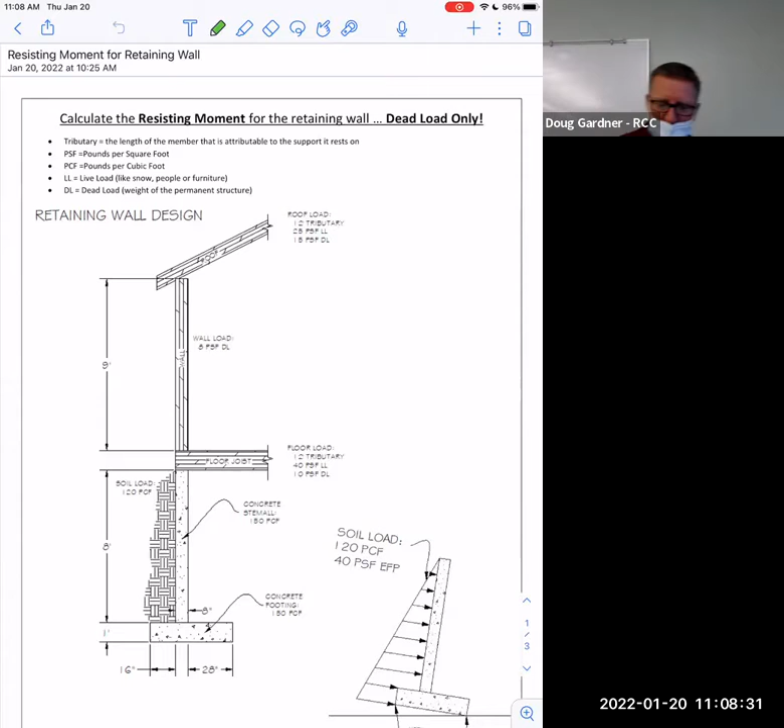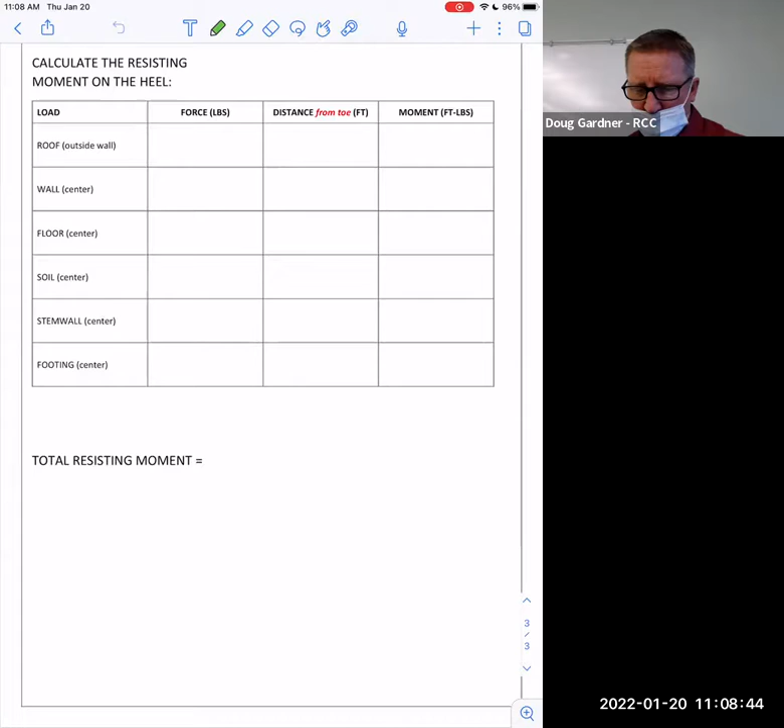So I want to give you a little background for this because I want you to understand. This won't take long once you get rolling, so I want to make sure you understand the logic. I'm going to show you some things that you don't learn in the book, but that exist in the real world.

So here's my intro to the, what did I call this thing? The retaining wall. And I mentioned this going out the door last week or Tuesday.

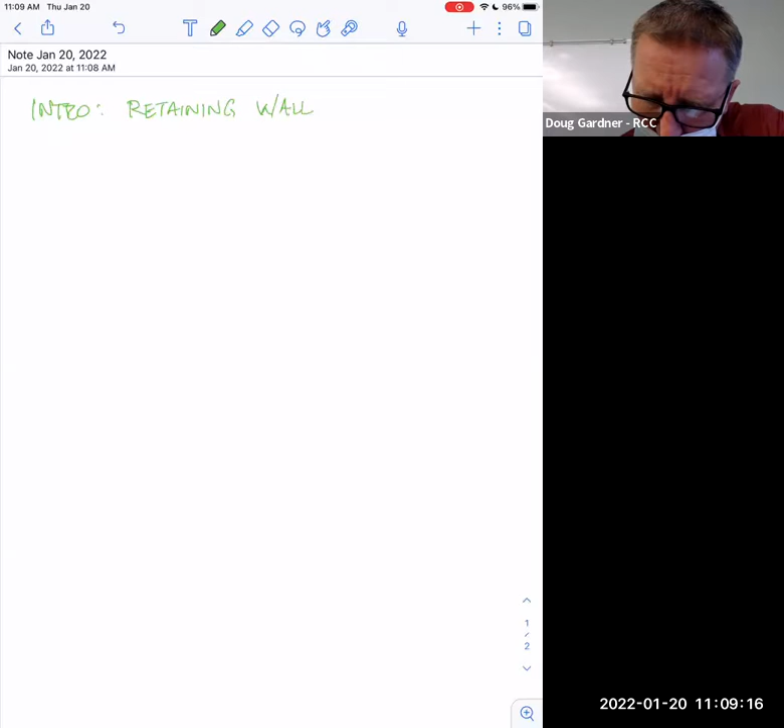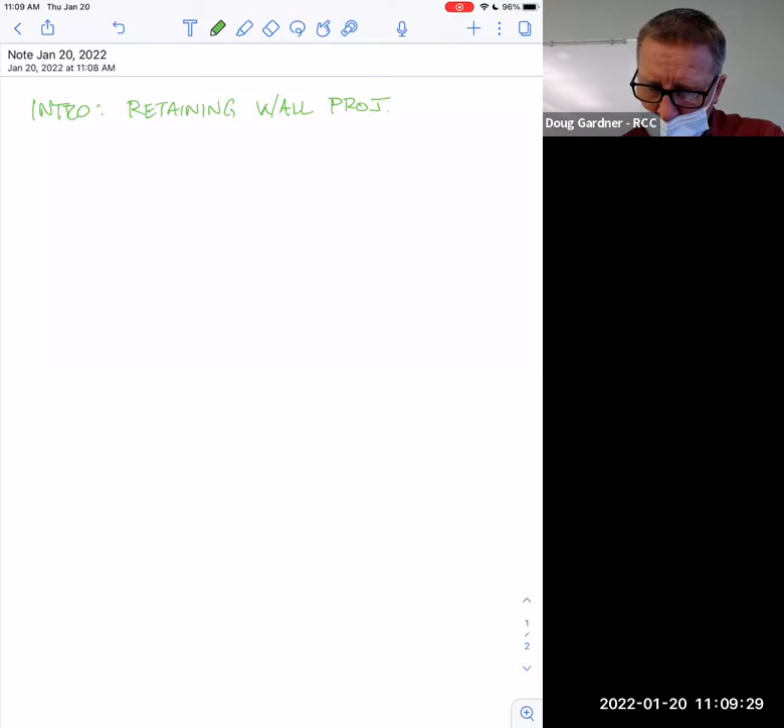Let's see, how do I want to do this? I think I'll try to do this in 3D. Let's do this upright. So let's say I've got this building, and so that's the four walls of a building.

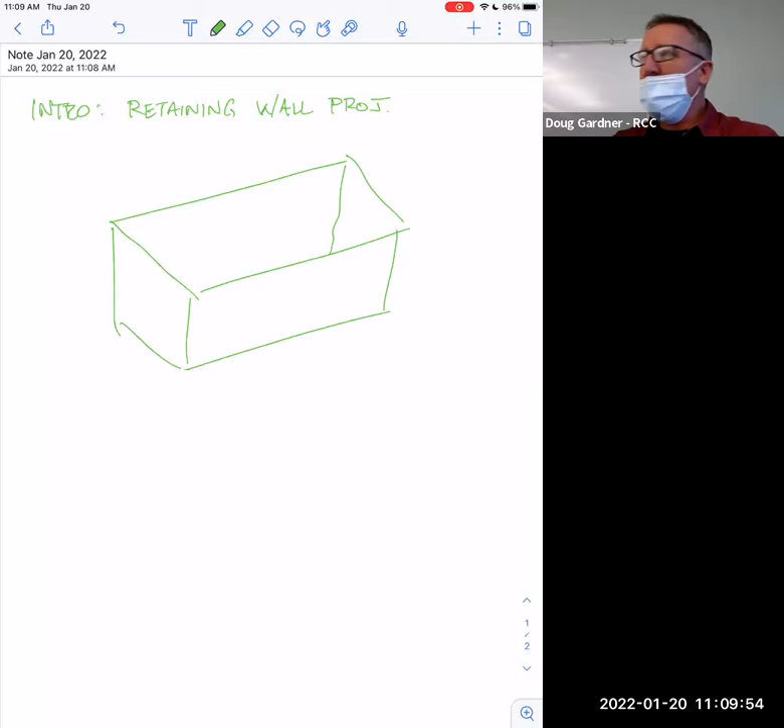And then because it's a two-story house, I say okay cool, let's put some floor joists on that house so I got something to stand on the second story. And of course that's what we're standing on right now because we're on the third floor and there's something we're standing on. So this is kind of how this happens.

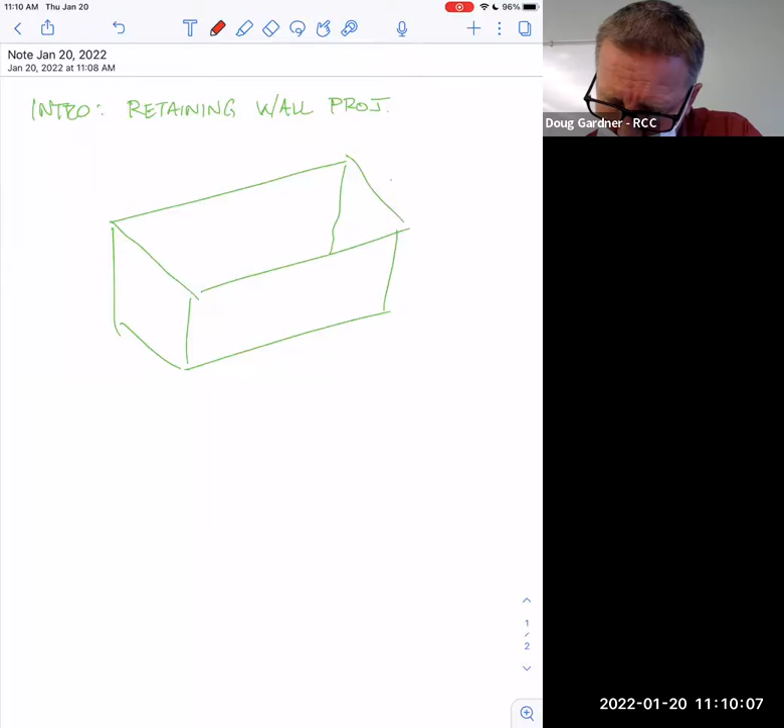So you build the four walls, and let's say this is 22 feet and this is 48 feet. So that's the size of our building. And here's what I decided to do.

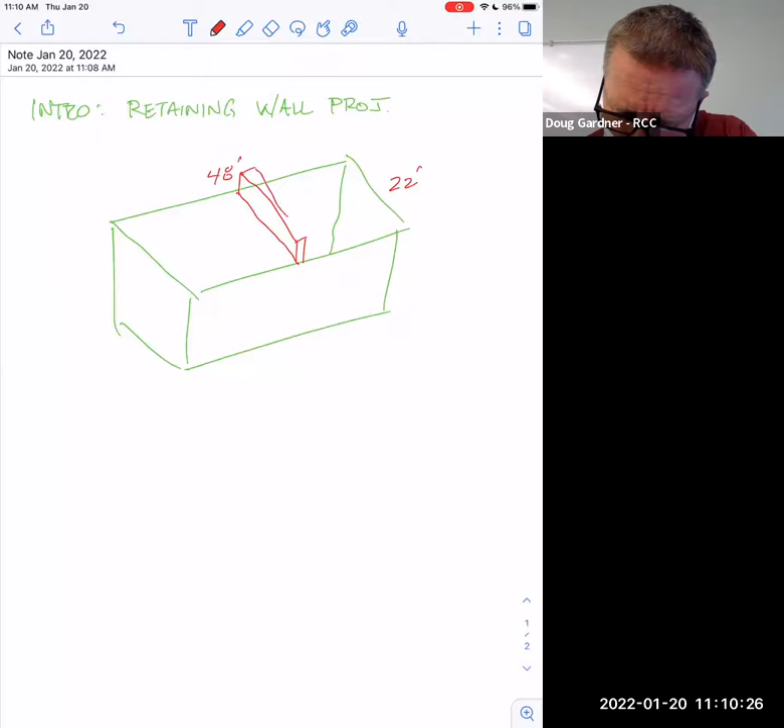So I'm going to put this beam on here because maybe the floor joists aren't strong enough to go all the way across that by themselves. So I'm going to put this beam in here and that's going to carry a whole bunch of the floor. I don't know if this makes sense, but...

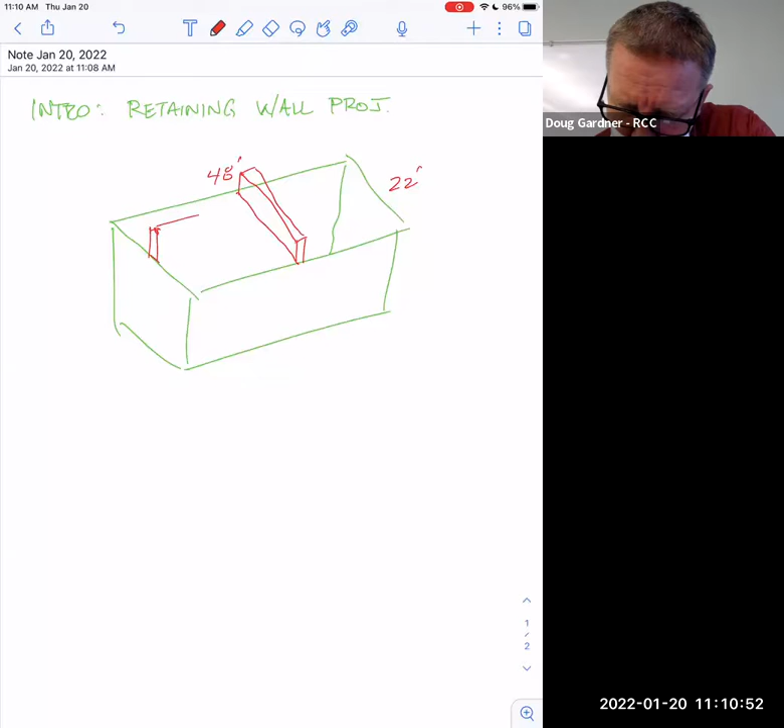Then the floor joist would come and kind of anchor into that beam. And so in the end, the beam is going to be holding a whole bunch of that floor kind of all by itself. Does that make sense?

And so if the floor joists are all sitting on there like I'm showing them here, kind of going so they're all spaced along there and the entire floor is there.

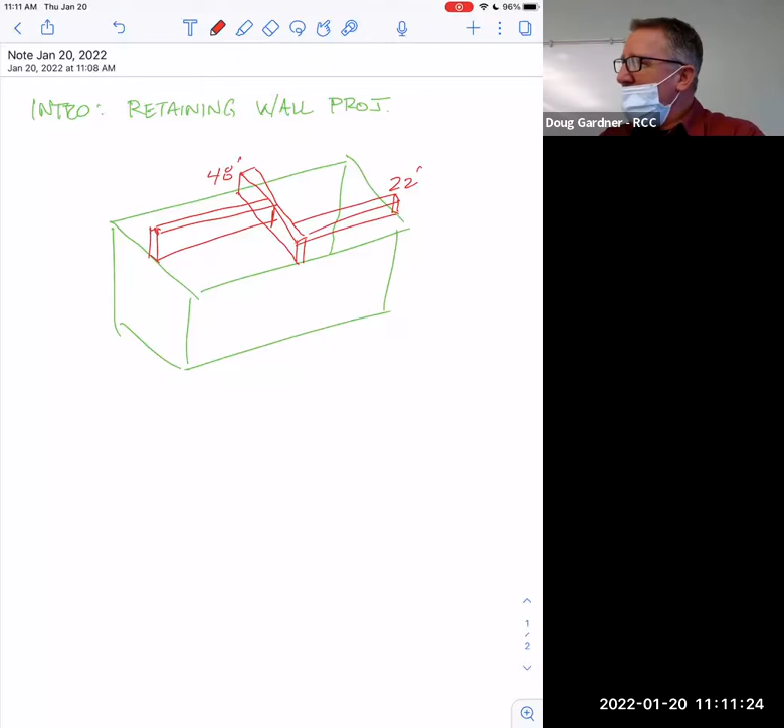So the question is, if you think about people standing on that floor, let's say there's a beam underneath this floor right through the middle right here. Well, does it make sense that if I'm standing right here, the beam is taking my weight? But if I go over here, now does it make sense that wall's getting my weight?

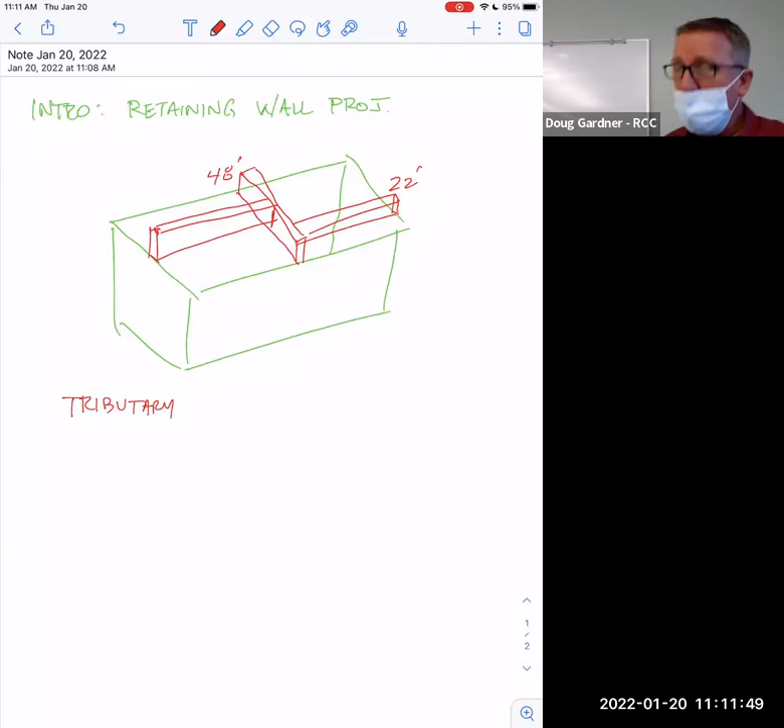So one of the issues here is something called tributary. This is on your sheet and it's a huge part of all beam design. Basically, how much is attributed to that beam?

Well, would you agree the beam is 22 feet long based on the dimensions that are sitting there? So it's 22 feet long, but what's its tributary? In other words, how much of that floor is the beam actually responsible for?

Well, here's the concept, it's really simple. If I kind of divide it right there, does it make sense that all the weight that's over here is actually attributed to the wall because I'm basically closer to the wall, whereas all the weight that's right here, all the people for instance, they'd be attributed to the beam. So that's kind of what I was getting at earlier. As it turns out, that's just kind of split.

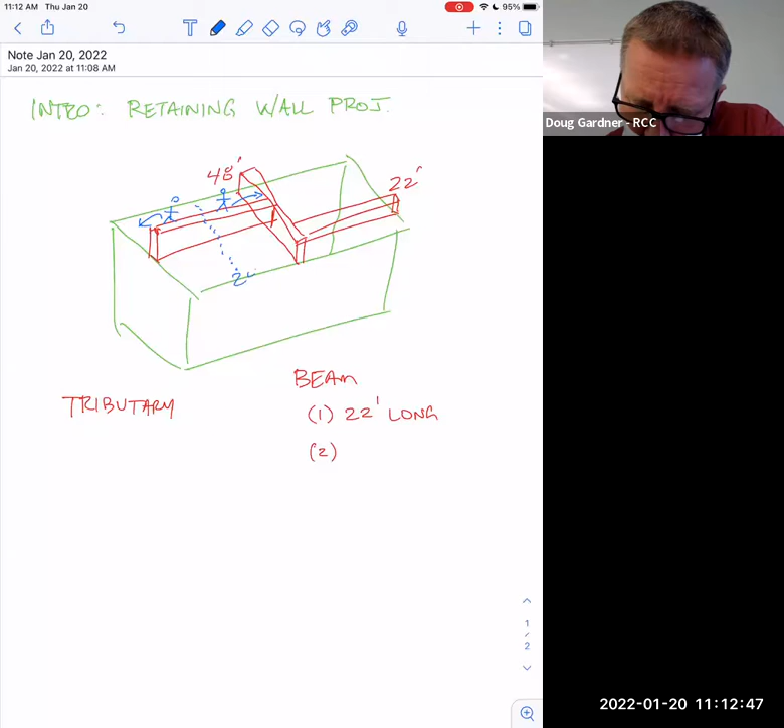So since that's 48 feet, then would this distance right here be 24 feet? And so basically this 12 feet, everything that's inside that 12 feet is sitting on the beam, and everything that's on the other 12 feet is actually sitting on the wall over here. Do you understand that? Does that make sense? Are you seeing that?

And so for that reason, basically the beam would be carrying this 12 feet and it'd also be carrying that 12 feet over there, for a total of 24 feet of tributary.

So the two things you got to know about a beam is basically how long is it? The longer it is, the weaker it's going to be. It's going to want to bend more and going to want to break more. And then how much of the floor is attributed to it.

Now it turns out floor systems in a house are 40 pounds per square foot of live load, and they are 10 pounds per square foot dead load.

So a total of 50. Now remember, the 40 comes and goes, but when none of us are in here, this floor is holding weight because it has carpet, a subfloor underneath it, and the floor joists themselves. Those are 10 pounds a square foot, and that's there all the time. That's why it's called dead load. Then 40 pounds per square foot comes and goes.

The room fills up with people, then people leave. This is not a roof, so we don't get snow. The only thing that would ever happen in here is people.

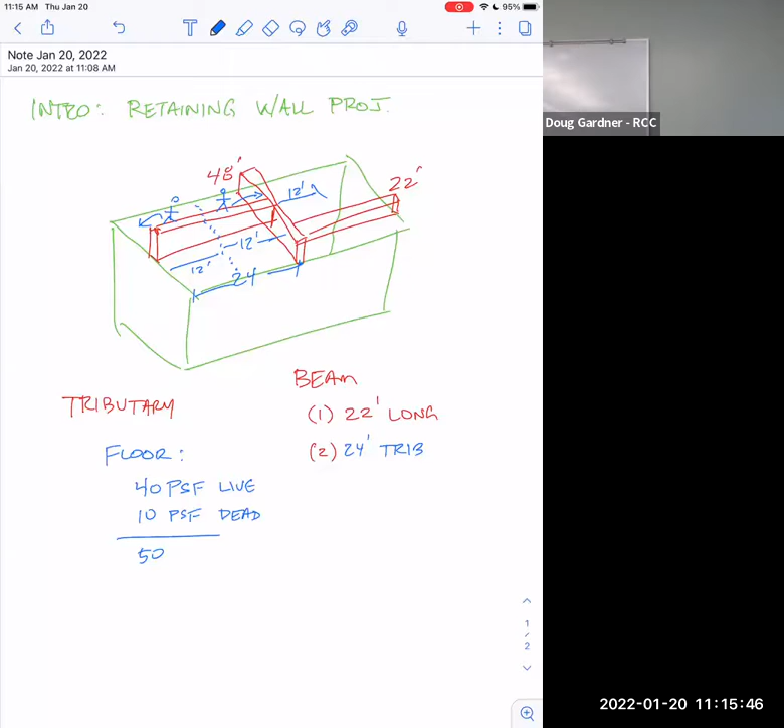Now, could we crowd in here like sardines and fill this up? Would the floor break? The answer is it won't break, but it'll deflect so much that downstairs people would notice it, and the sheetrock would crack. Or if we all jump, jump, jump packed in here together, that would impact it like that. Maybe this wouldn't be designed for that. 40 pounds might not do it then.

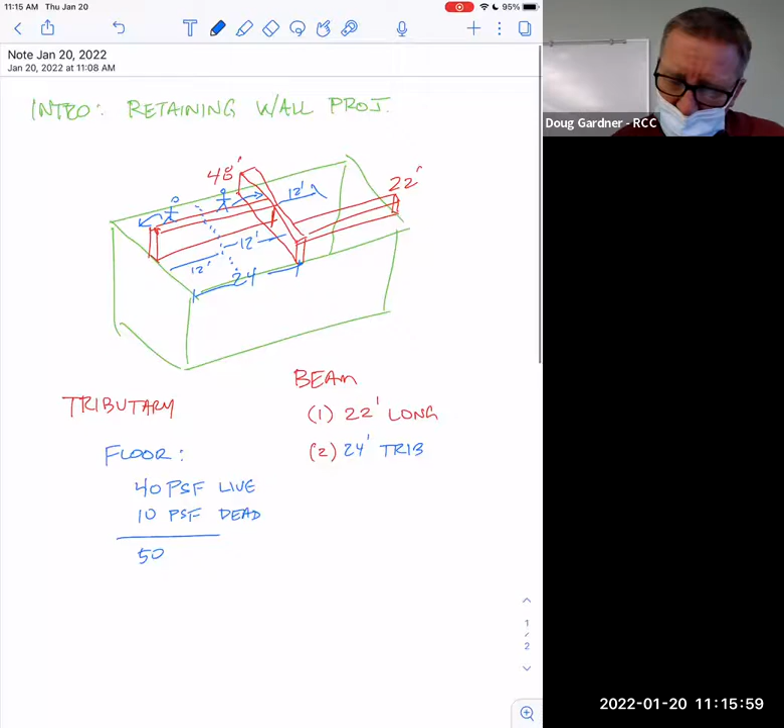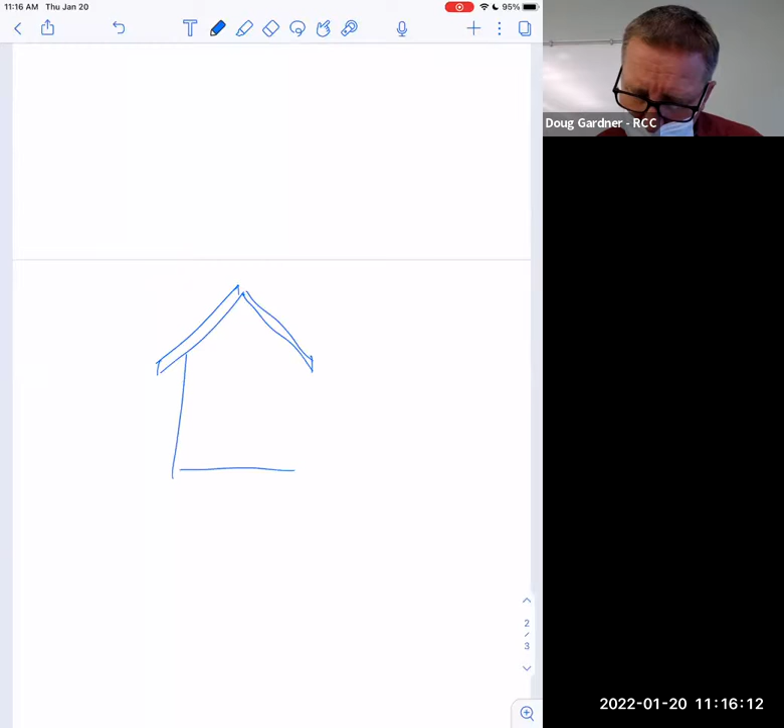And so all I really want you to understand is this concept of tributary - how much of that is sitting on here. So let's look at another example, in the case of a roof. So here's a roof. Let's say this house is 36 feet wide.

And out here, I've got snow coming down on the roof and so forth. A roof for at least a house is 15 pounds dead load and 25 pounds live load. Why do you think the roof would have more dead load than the floor? What is the roof carrying that's dead that weighs more? That's live load because it comes and goes.

Yeah, like roof shingles are made out of rocks and stuff, or maybe even tile, like a tile roof. There's just more stuff up there. It weighs more than carpet. What you put on your roof usually weighs more than carpet. So that's a larger dead load.

And then live load, interestingly, it's less. You think, well wait a minute, but people weigh more per square foot than snow does. It depends on what area you're in. The other thing I'd say is that 25 live load is because of where we live. You notice the other day it snowed like a foot - we never get that. Well, that's why right there.

But if we lived in Colorado, would it be 25 pounds a square foot? No, it would not, it's way more. I've drawn some stuff that was up by Callahan's on top of the pass going over, and it was like 90 pounds a square foot. Again, if I screwed that up, that'd not be good - that's a game changer. There's a website you can go to where you type in the longitude and latitude coordinates, and engineers and truss companies and people like me that draw plans can all go there and get that number.

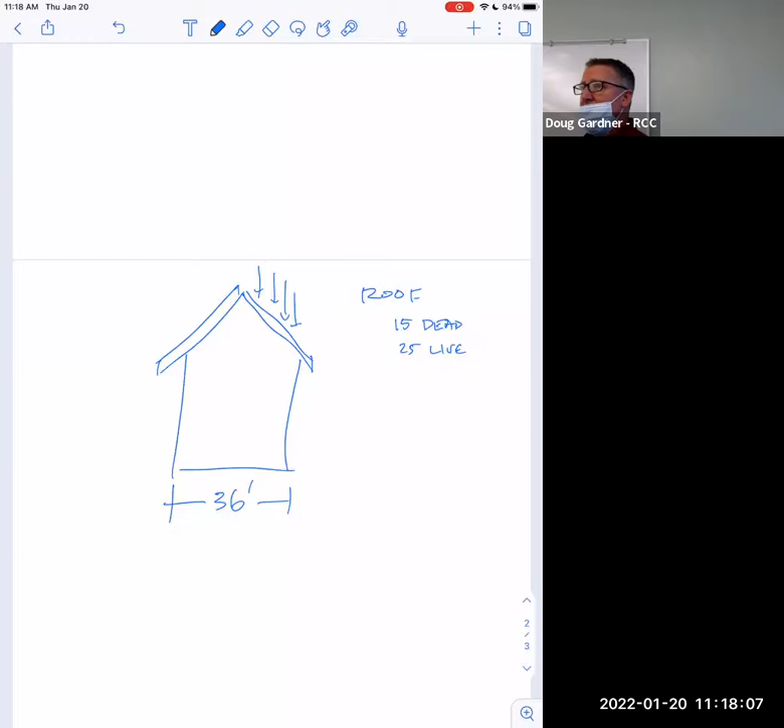So the point is, the load in the real world is not some arrow aiming at a drawing of a beam like it is in your book. You've got to come up with that yourself. There's never going to be an arrow aiming at something like your book assignment. You have to go determine the load yourself based on what the standards are in that particular area, and the concept of live and dead load needs to make sense.

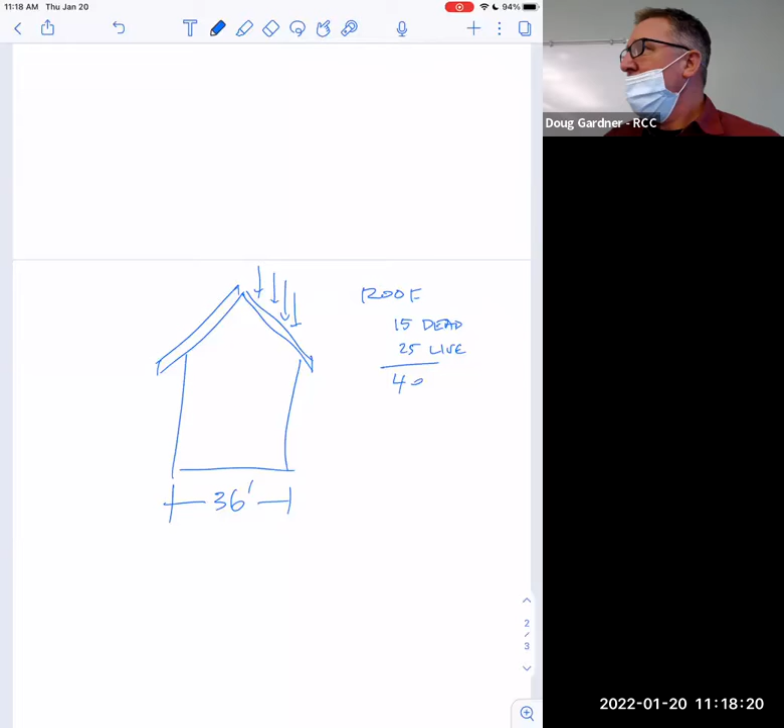Now, from my perspective, this still adds up to 40, and I don't really care because I have to think of it as loaded, right? So as far as I'm concerned, it's really 40. So I have this wall over here.

And so let's say we took out this wall because this is somebody's porch and we put a beam right there. So that chunk of the house is actually not sitting on a wall, it's sitting on a beam. Well, how much of the roof is attributable? That's why it's tributary. How much of that roof do you attribute then to that beam?

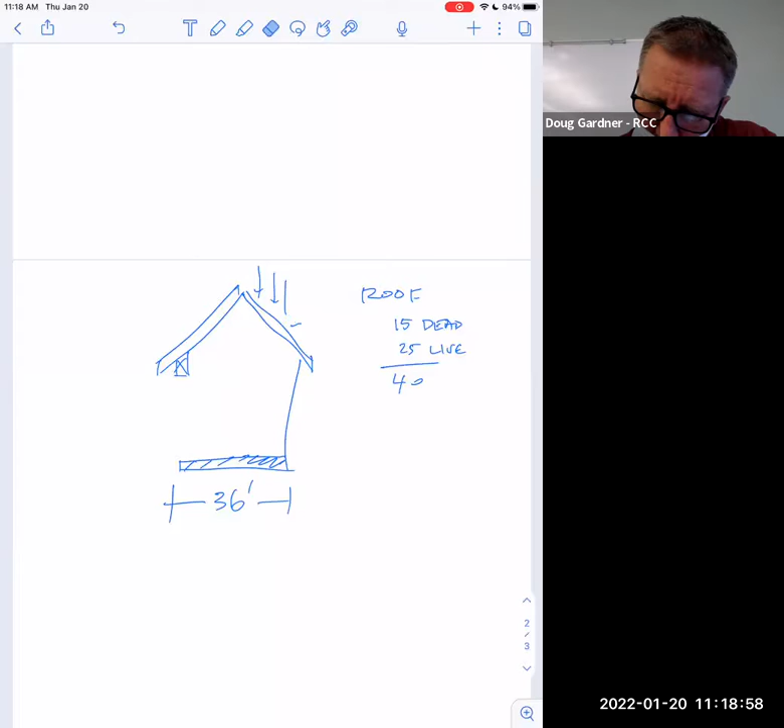Does it make sense to you that this snow over here is going to land on that wall? So that snow on that side is not attributable to the beam. So again, it's cut in half. This building is 36 feet wide. Everything on this half is going to sit on that beam, and everything on the other half is going to sit on whatever's on the other side of the house.

So that means this would have 18 feet of tributary. Now, if the building itself was 36 feet wide, and then this was, as it often is, a 1 foot overhang, does it make sense you'd have 18 feet plus the overhang? So that'd actually be 19 feet of tributary then? Does that make sense?

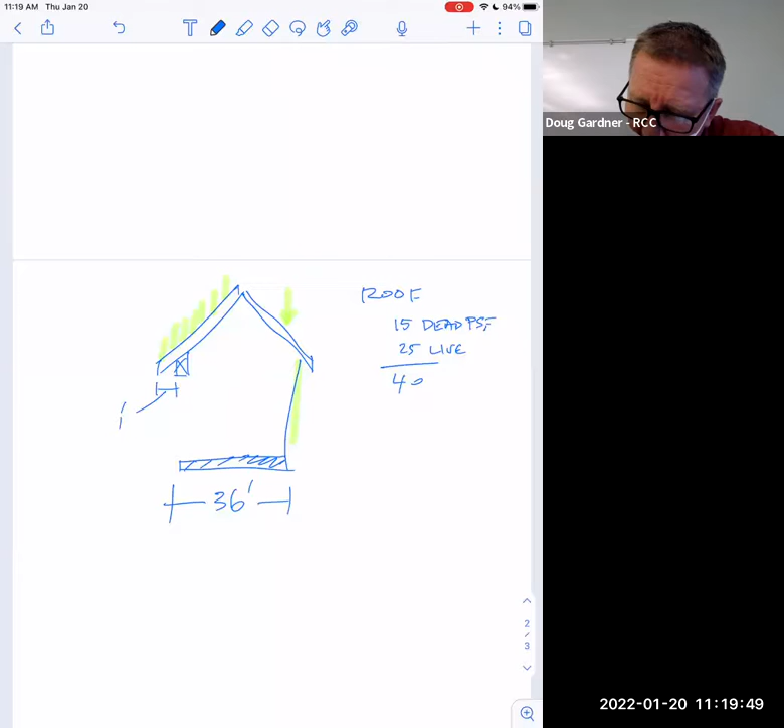So then here's kind of the calculation that I would make. Remember, these are pounds per square foot numbers. So since this is 40 pounds per square foot, then I would say times 19. Well, wait, it's 19 feet, isn't it? It's not 19 square feet.

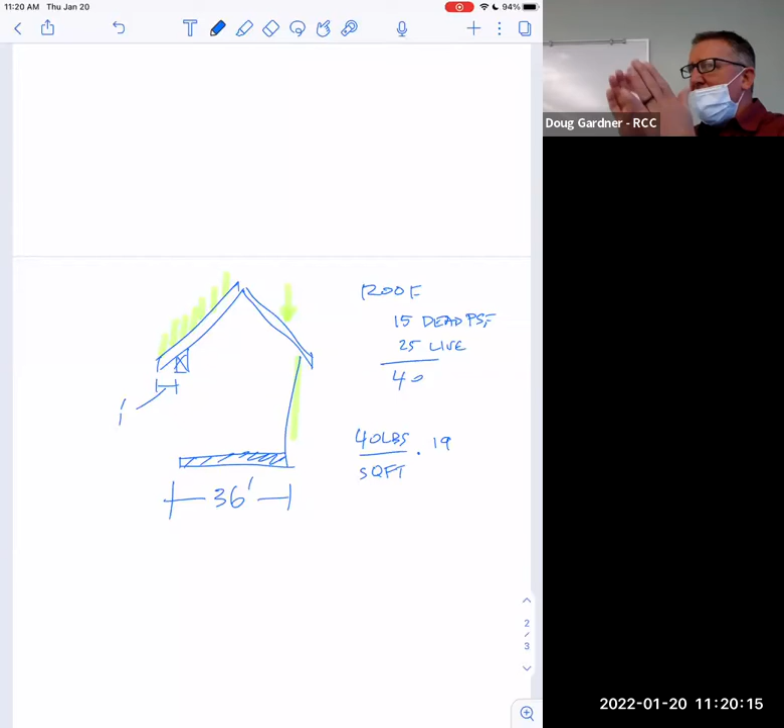But what we're considering is a 1 foot stripe of the house. Basically, how much does every foot of the beam have to carry? So in a sense, you've got to picture the roof as being 3D like this. And a 1 foot slice of the beam up there, that'd be a 1 foot by 19 foot slice. So that is actually 19 square feet. Does that make sense? Those units would cancel, and that would tell me how many pounds are actually sitting on that beam.

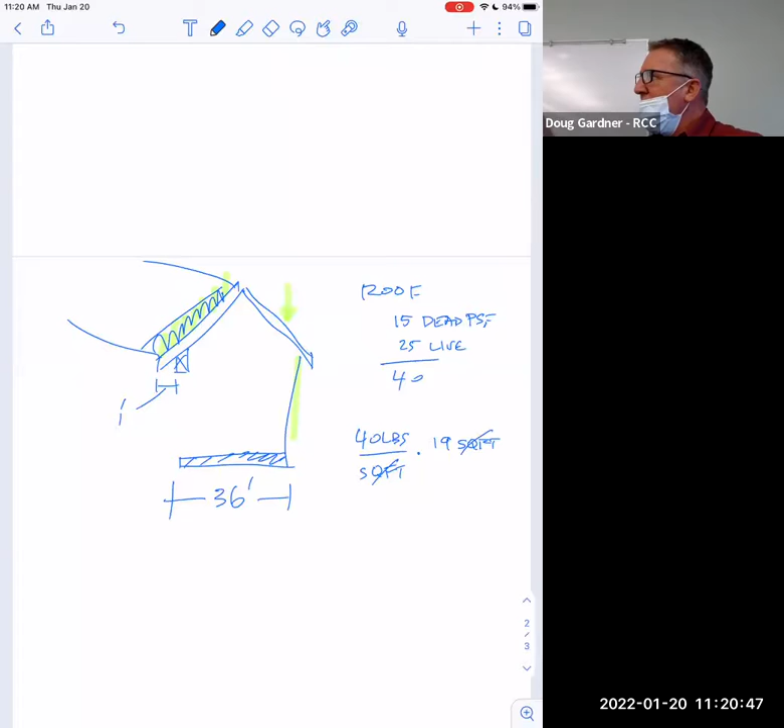So if it was 20, that'd be 800 pounds. So I have 800 pounds attributable to it. And that's one of the things I can look up. I don't have this easy for me to see, but I've shown you quickly some of the beam charts, and one of them will say, how many pounds per lineal foot can this beam hold? Well, I need 800, so I need some beam that can hold more than 800.

Okay, so that's a rough introduction. Now let's take a look at our problem. You don't have this, but this is the problem when you put soil against the retaining wall. If you push against it, then it wants to tip up like that. Well, that's moment, right? This thing wants to tip over.

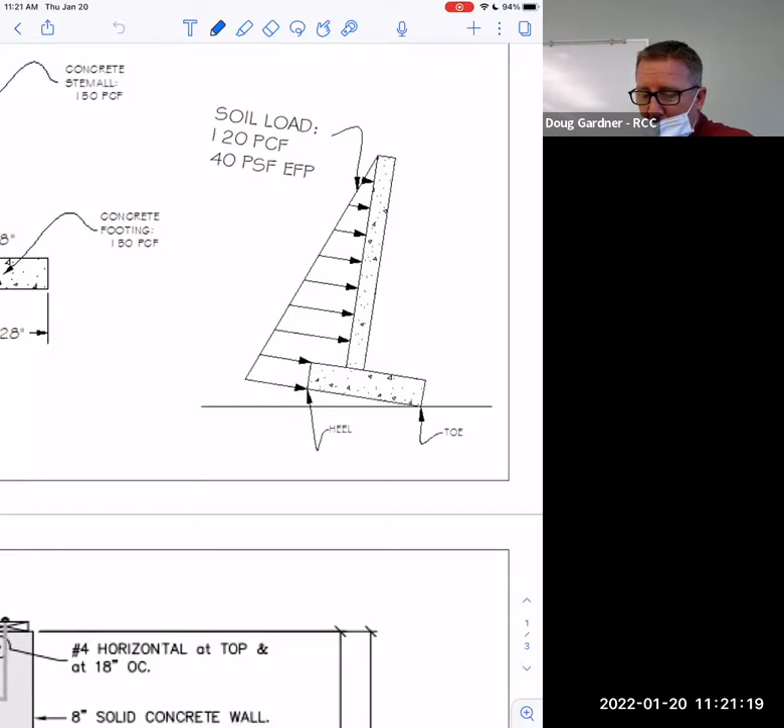Now, if those forces are pushing on that wall, does it make sense? The other thing it wants to do besides tip like this is just flat slide. And isn't that what we've been studying lately? That's why this project lives here. Isn't there two things that can happen to this wall? It can translate, it can move.

And in our case, it would just move along the X direction. It's not going to lift up or go down, but it will slide in the X direction. Or if there's enough friction, or in the case of, see if I drew it this way. Sometimes in the case of a real house, if this is the outside dirt and this is the house, there'll be like a concrete floor poured here. And so it'll hit against that floor.

So it won't be able to slide this way. But if you just set it on the dirt, it darn well could slide along the dirt. So maybe I have to drill some holes in it and run some concrete down into the ground so it can't slide. If it doesn't slide though, it still can kind of do this over time, right? I said over time because it probably won't do it immediately, but over time it can start bending like this. That's called overturning moment. Do you notice those arrows get longer and longer and longer? Why would that be?

The further down you go, the more dirt there is pushing. This is the concept behind scuba diving. If you swim underwater, there's more and more pressure the more you go down because you have more water sitting on top of your head.

One of my great childhood memories is deciding I was going to put my mouth on a hose and swim to the bottom and hang out down there, because now I've got a hose that goes to the top and I can just breathe. If you haven't tried that, you've got to live a little more. It seems like that would work great, but it doesn't work at all because there's so much water on your chest, you're not strong enough to inhale.

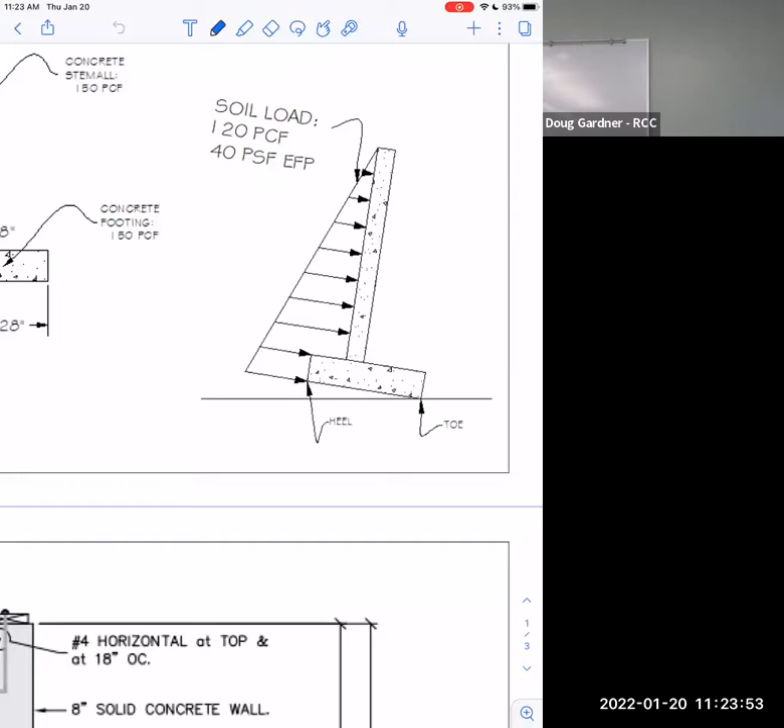So you can imagine if you go down even further, it's even worse. We won't talk about that now, but see how that's triangular loading right there? That's not one arrow pointing at it, it's lots of arrows. That's something we've got to figure out later in this class, how much that would really be. Just out of interest for now, notice it says 120 pounds per cubic foot. That's how much dirt weighs, that's the accepted value. Notice it's cubic feet because that'd be a volume, not an area.

Then there's 40 pounds per square foot effective fluid pressure. Actual water is really good at taking downward pressure and converting it to pushing sideways. But dirt has a lot of friction in it, so dirt wants to go down, it's not going to push sideways. So you get only like a third of the amount of force sideways as a result of it being dirt. But the point is, there's weight back there for now.

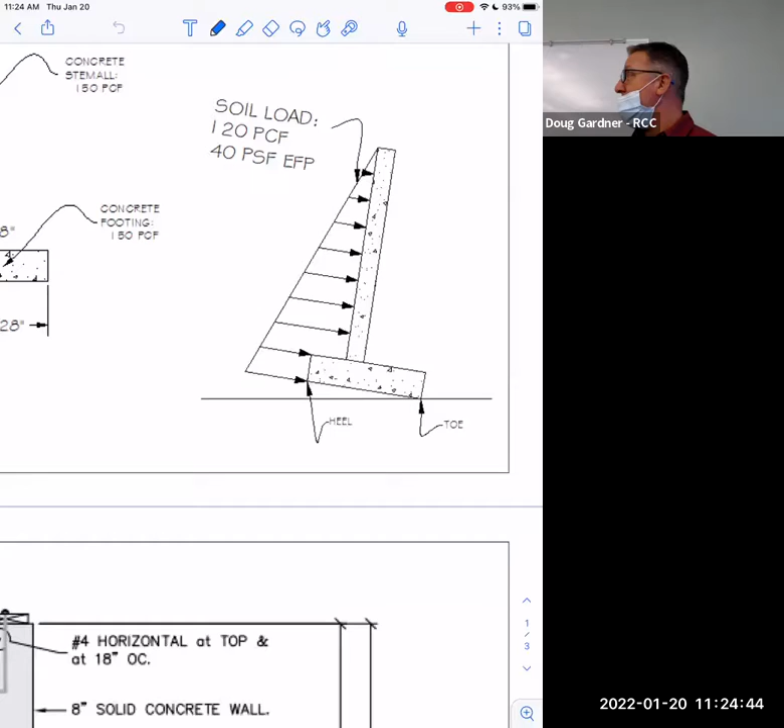And if it does tip, notice that there's a toe and a heel, and that's actually the word for it, which is kind of nice because it makes sense, right? It all comes down to that thing wants to do that, that's what it wants to do. So if you just build it like that picture shows, it's not going to work because there's nothing keeping that from happening. But take a look at this picture over here.

There's the foundation with its dirt behind it over here, but notice there's a whole bunch of stuff keeping that from happening. This is called resisting moment, and again, that's the language of engineering. That should mean something to you now, like, oh, I know what moment means, that means rotation, and we need to resist that.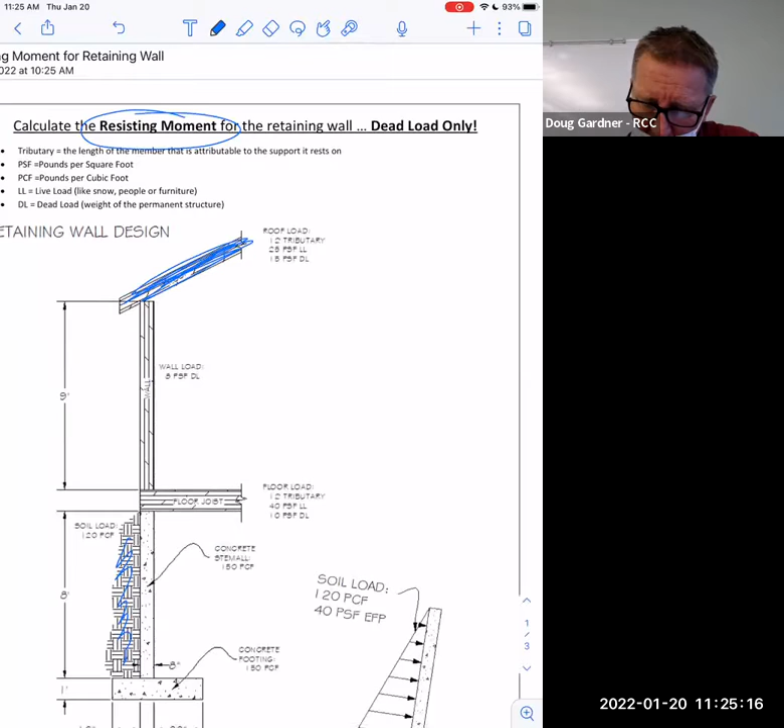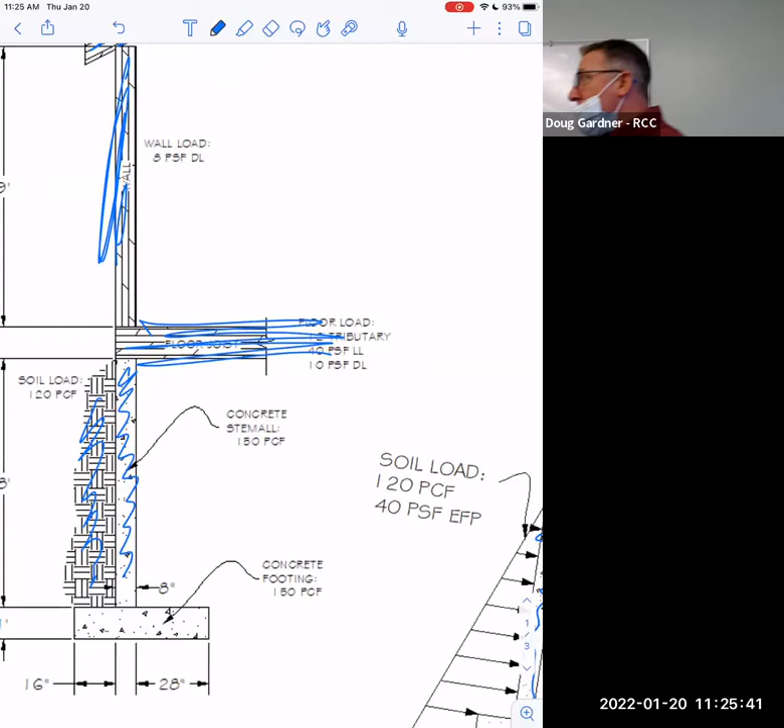Can you see that the weight of the roof up here has weight, the weight of the wall has weight, the weight of the floor, because this is a 2-story house, has weight, just the weight of the concrete wall itself. Can you picture that weighs a lot? That's not, you're not going to walk up and push that over. Concrete weighs a lot, it says in here 150 pounds per cubic foot, you can't even lift that. So you're not going to walk up and just push this over yourself. So even with nothing else but just its concrete, it doesn't want to do that. Does that make sense? It's going to take a lot of dirt just to kind of get that to tip.

So we've got all kinds of stuff on this house. Even this dirt right here is actually parked on the back, isn't it? Like it has to lift that dirt, doesn't it? And it doesn't, that's helping. And then just the weight of this thing alone, I mean, here's the footing, it's like you have to work to lift that up in the air, even if there's nothing else pushing down.

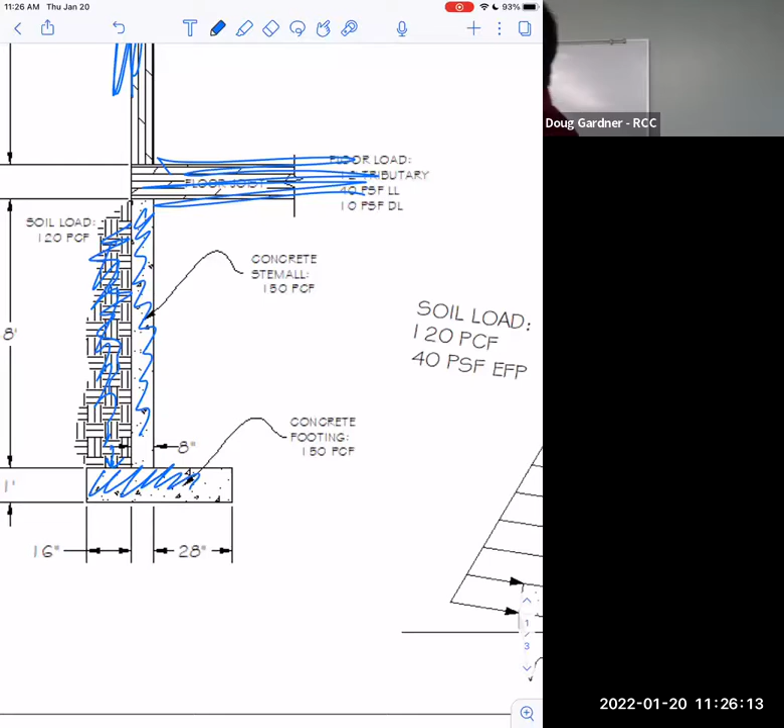Now that I'm pushing, it really doesn't want to lift. So look at all that stuff that's resisting that. Well, this is what you do as an engineer.

You are the person that specs out that I want this wall to be 8 inches wide. The most important calculation here is how big is this piece of concrete and how big is this piece, because that's how you control the D in force times distance. You get to make that distance right here as long as you need it to be so that it's really hard for it to lift. Does that make sense?

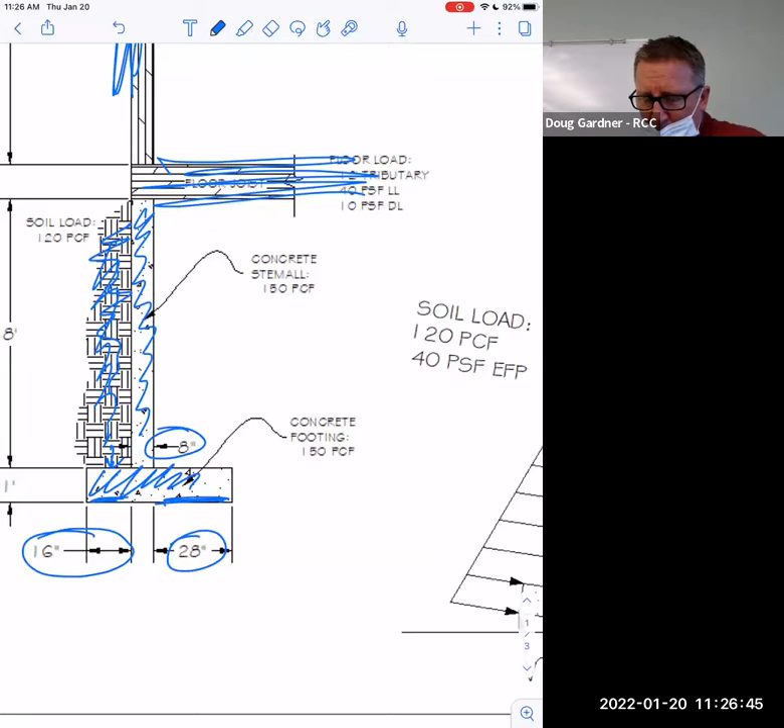So notice I'm telling you all kinds of things here. I say, okay roof, what is that? You have 12 feet of tributary, and then 25 pounds per square foot live load and 15 pounds per square foot of dead load. So that's enough for you to tell what that roof actually will weigh.

And we are considering this as a 1 foot slice of this house, you might add this to your notes. Basically, if we can get 1 foot to behave correctly, then that means all of the feet will behave correctly. Do you see what I'm saying?

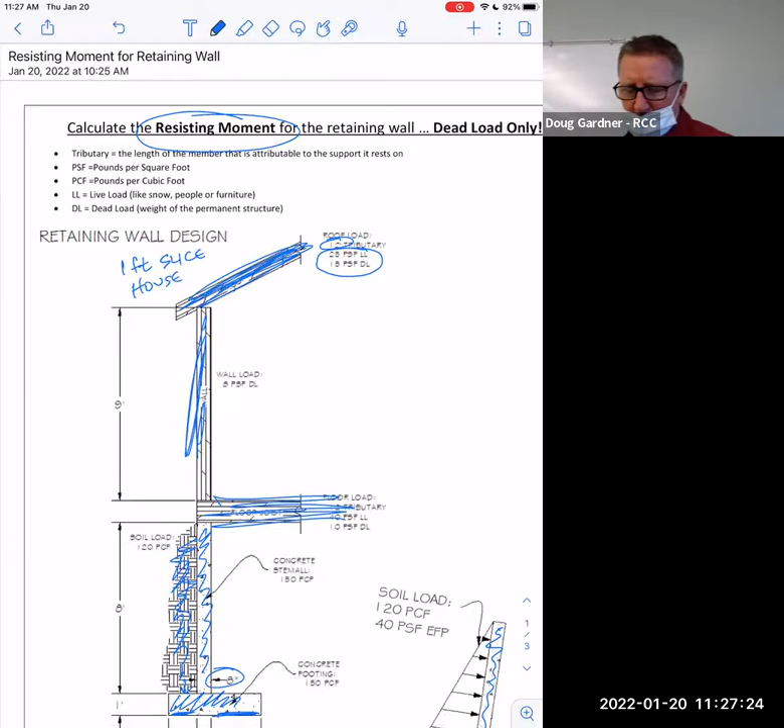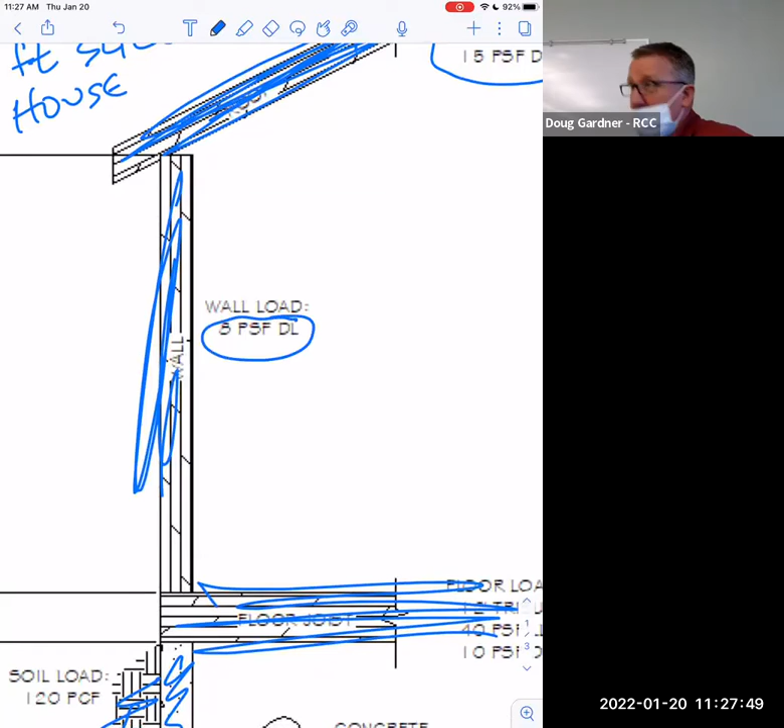And then the wall. How come the wall has 8 pounds per square foot dead load and no live load? Yeah, it doesn't snow on walls. You don't walk on them. There's no other load, it's only dead. I mean, you can hang a picture on it, but that's kind of like a fly, right? Nothing changes. That's why a wall's only dead load.

So that's 8 pounds per square foot of dead load. Notice you need to know how tall it is, because the taller wall is going to weigh more. So you have to think of that as a 9 foot tall, 1 foot wide slice of wall, and then it's 8 pounds per square foot, so you can actually come up with how much that wall weighs.

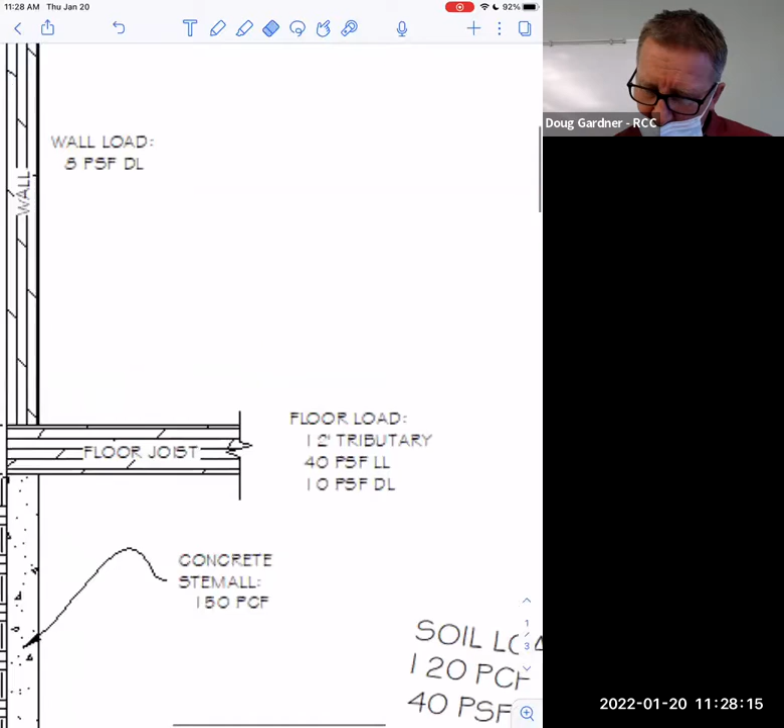And then let's take a look at this floor. Just like the roof, it's got 12 feet of tributary, so maybe this is like a 24 foot wide house, that's why it's 12 feet. And then I gave you the same floor load numbers down there, 40 and 10.

And then you've got this concrete, and notice I told you the dimensions, it's 8 inches. It's 8 inches here and it's 8 feet tall, so you know the dimensions of that by 1 foot wide. Notice the units are problematic because that's 8 inches, not 8 feet. So you can't treat 8 like 8 - those are two different 8s.

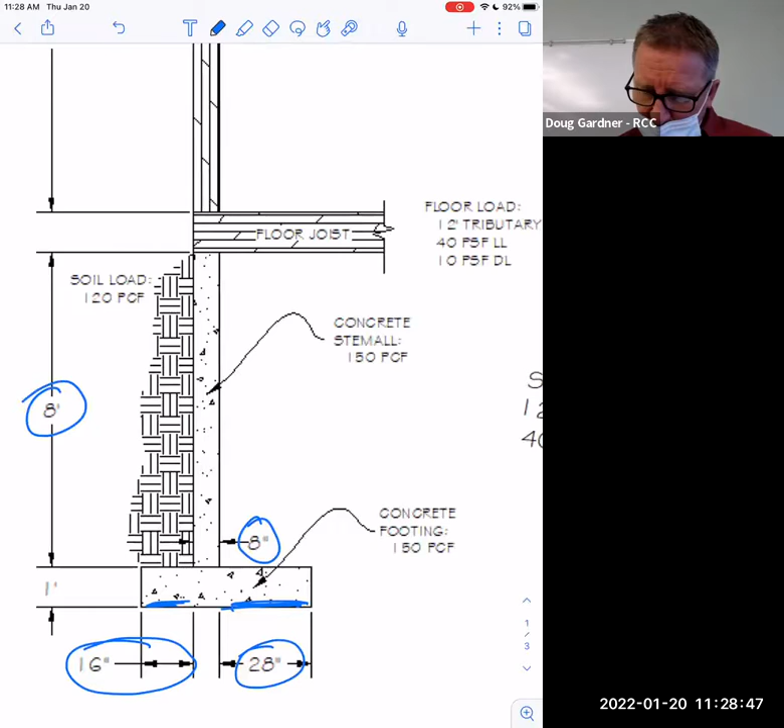And then you've got this footing over here, it also is made of concrete, and you know its dimensions. Notice this 8 up here would be this distance here. So you have 8 inches and 16 inches and 28 inches. So that's, altogether, whatever that is.

And then lastly, you've got soil. As I told you a second ago, it's 120 pounds per cubic foot, and that's pushing down over here. And so those are all the things trying to push back, and this is very important that you understand this, you should add this to your sheet.

That's the tipping point right there. So that's where our distances are going to be determined from - the toe, or the tipping point. Everything, all of these forces, are to the left of that.

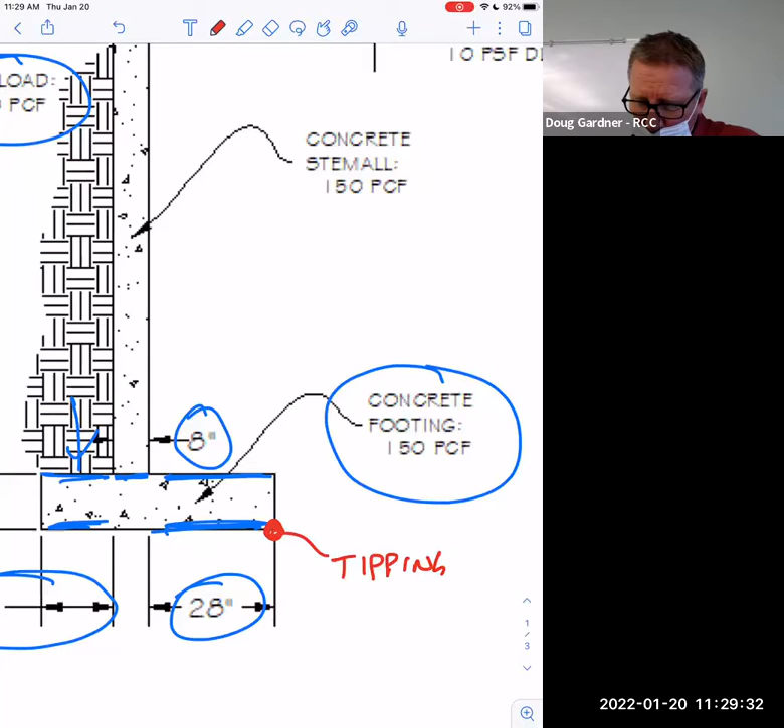So what I want you to calculate then is, what is the resisting moment? Like how much force times distance is there pushing back there? And then later on, we'll see, okay, now how much is the dirt going to try to tip it, and we need to make sure the resisting moment is bigger than the tipping moment. And if it is, we can guarantee that's not going to tip over.

And you can appreciate in the real world, like this is someone's house that fell down. That's like a $1 million mistake right there. You can't do that. One of those in your lifetime is all of the money you ever make. You can't get this wrong.

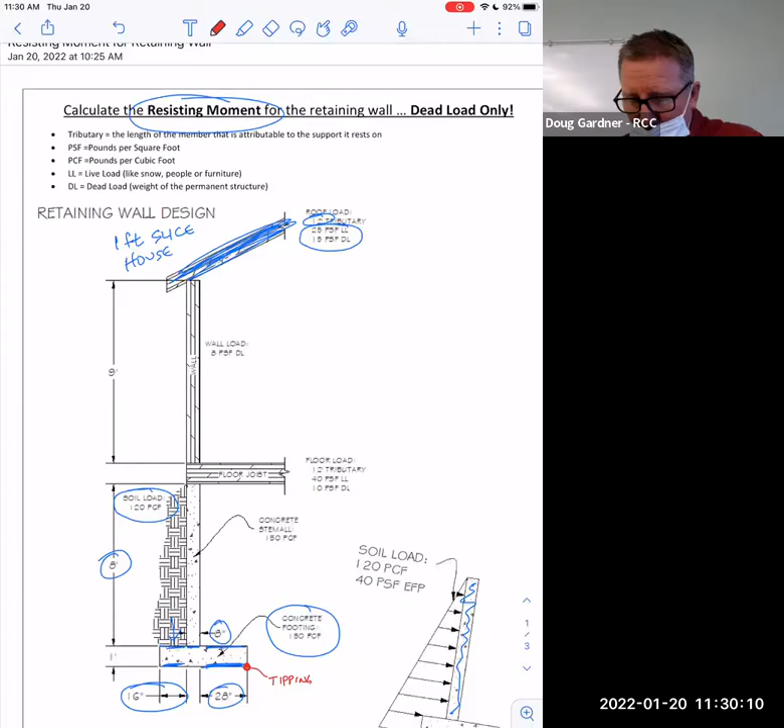So then I have a few abbreviations up here at the top. I've been saying them out loud, but just so you know what those are. Now, check this out - why did I outline that in black?

Calculate the resisting moment for the retaining wall, dead load only. Why did I say dead load only? So we have one answer, the basic one - we're not taking into account snow or people, just the basics. How can we? Why are we doing that though? Just because we want to?

Oh, this is for the wall, because you're not gonna have a live load underground, right? Maybe if you add more. Well, these are live loads - it snows up here, hey look, it snowed on our roof. Hey look, people, water beds.

Because that's not changing the moment, is it? Yeah, because the more live load you have, the more it's gonna be pushing down on it, so it won't want to tip. So the dead load is the least amount of force required to keep it from tipping. Exactly. Can't live load go away? Like, oh, snow's gone. Well, then you don't have the snow helping you hold it down now. You can't count on the snow being there, right? What about people? Oh, they're gone, they're at work. You can't count on live load because it might not be there. You need - if everybody leaves, you can't have the house tip over.

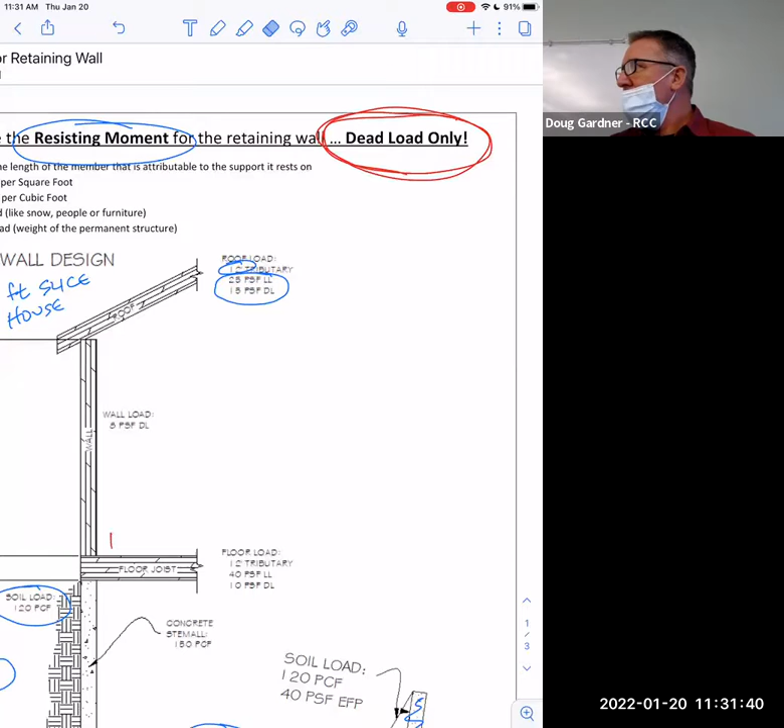And so you got to stay home, hang out over here. Live load doesn't exist permanently - it comes and goes. That's why it's called live load. So we can't calculate off of live load - that'd be an honest but life-changing mistake, right? So this is real. So even though there was live and dead load, I can't count on live loads here. I can only work with dead loads.

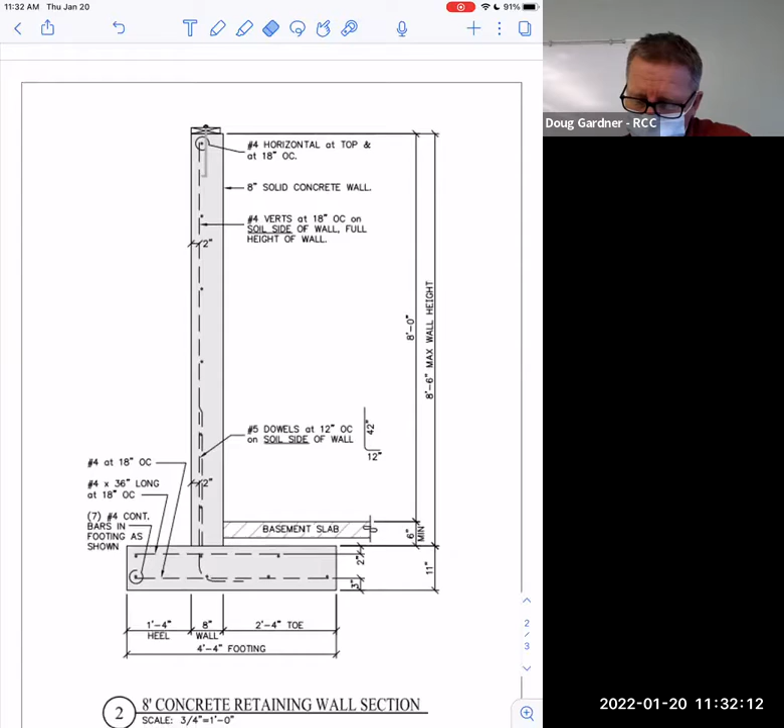Now, I gave you a giant drawing - this is the actual drawing. And by the way, this is exactly a house that I had engineering done on. If I had time, I would show it to you. But I took this problem directly from what my friend sent me. And notice, by the way, do you see how he has a basement slab drawn in there?

Does it make sense? That's going to keep this thing from sliding. So that's taken care of, because there's something pushing back against that. This isn't just sitting on the ground. For a long time he used to ask me, is there a slab down there? And I was always like, why do you care? Why do you need to know that? Now I'm like, oh, that totally makes sense, because this thing will slide because we got a bunch of dirt back here pushing on the back of this.

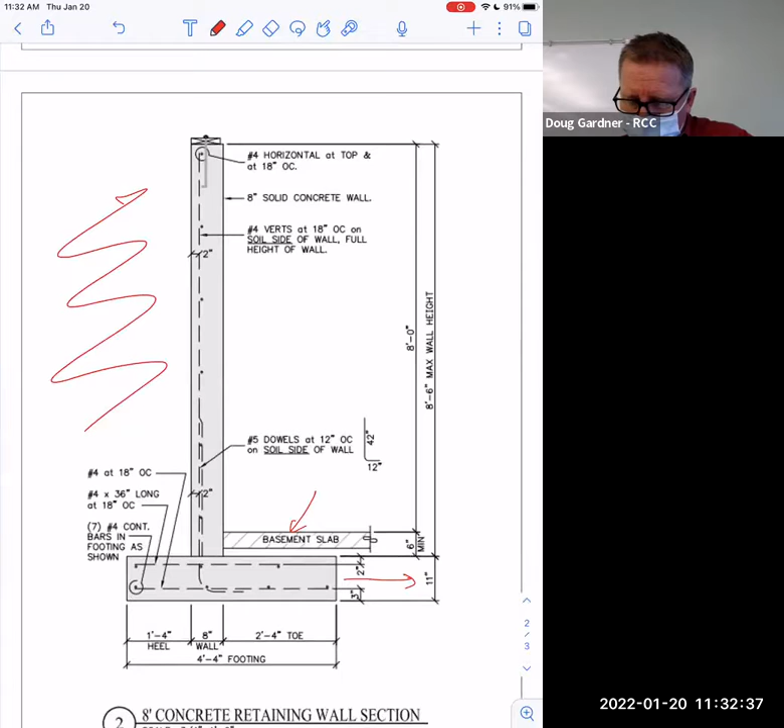And notice the toe side of this is really big, whereas the heel side is kind of small. See, that's the decision he makes - he's the nerd, nobody else understands that. The people that go out to pour the concrete, they just look at these dimensions and pour what the engineer said. The builder doesn't understand. None of us understand it. Only the engineer makes the calculations you're making and understands them, and there's nobody they can even tell. They just make the calculation, stamp it, and say this will be great. And everybody goes okay, and just does whatever the person said.

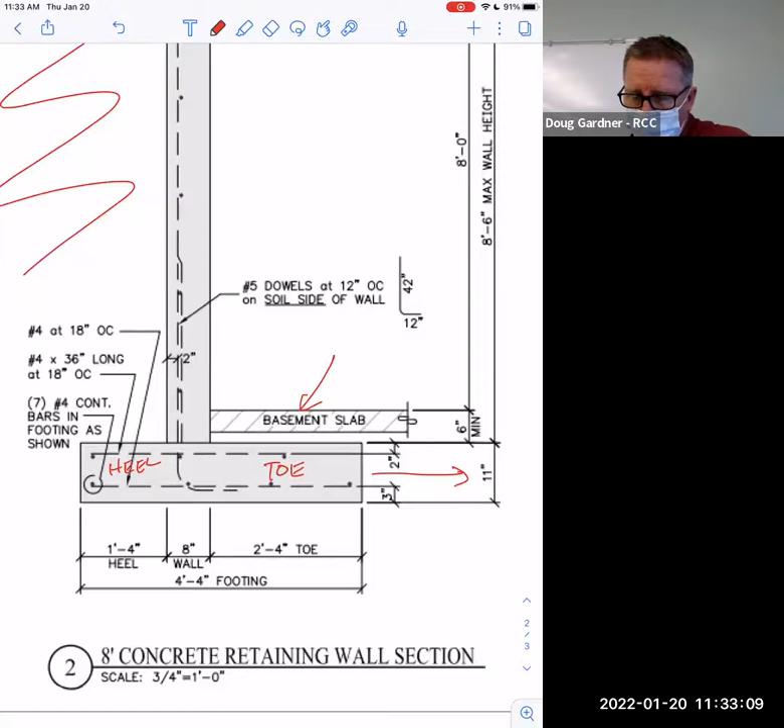So these dimensions are also in the drawing above, but notice in the end, this footing was 4 feet 4 inches long. That's huge - that's like this wide. That's a really giant footing. And what I want you to see as you're making these calculations is why is it so important that that toe is so big? Does it make sense that that's creating the distance you need?

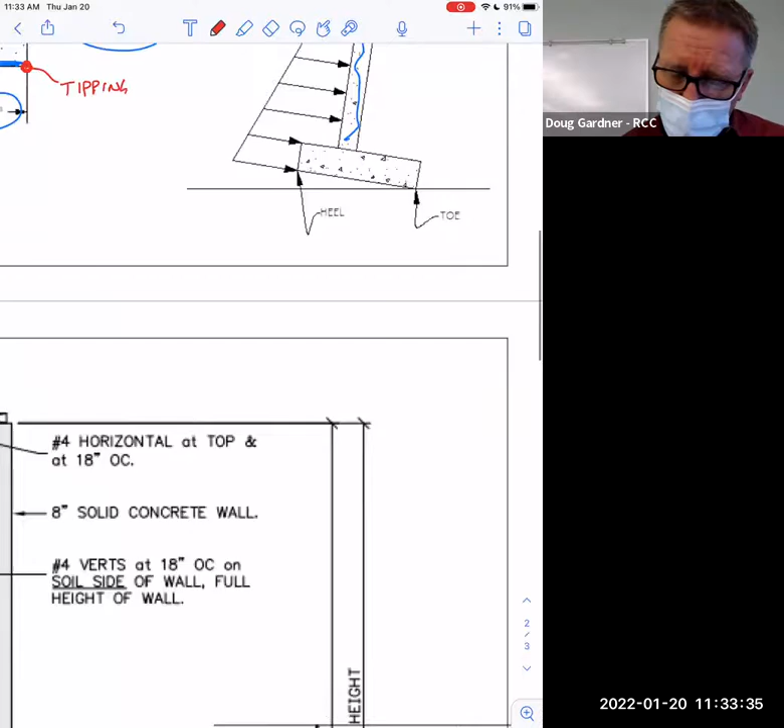If you look back at this drawing, isn't all of this weight kind of back here? And so isn't the length of this causing that toe to be way out in front of you? And so that makes the distance D really large. And since moment is force times distance, if I double that distance, I'm going to get double the amount of moment just by making that toe part of the footing a little bit longer. Does that make sense?

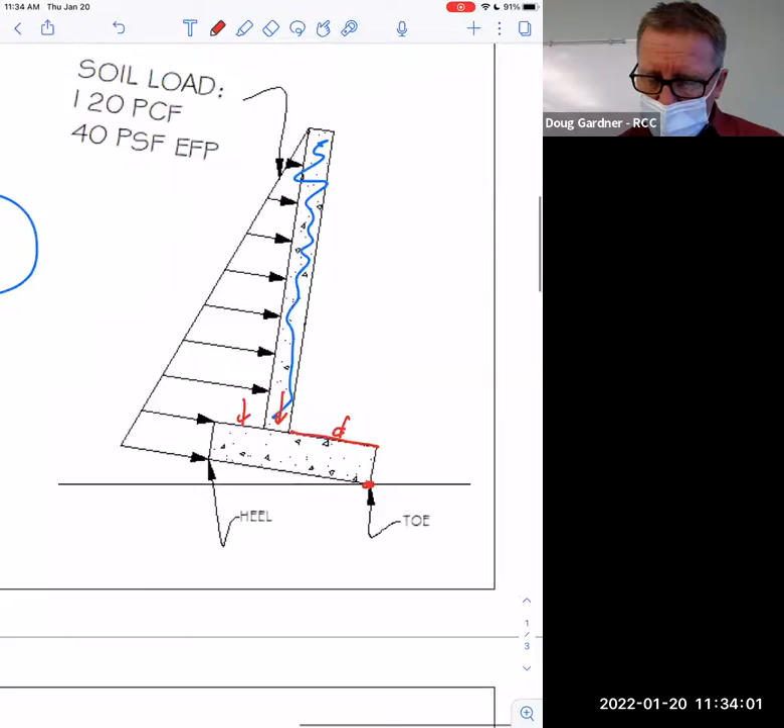Now, I may give you something about this for extra credit, because one of the things I asked him is, how do you know to make this toe 2 feet 4 inches, and then go make all the calculations? What if it's too small - now you got to make it longer and do them all again. Or if it's way too big - oh, that's way bigger than we need, let's make it smaller and calculate it again. So one of my questions to him is, how do you know that? And his answer to me was, I just kind of have experience, because I noticed when I calculated his, it was way too big.

I was like, God, you're spending people's money and time when you're doing that. But I get, from his perspective, he goes out of business and gets sued if he gets it wrong. So he's definitely going to make it bigger than it needs to be to make sure he never gets any phone calls, which he's right to do.

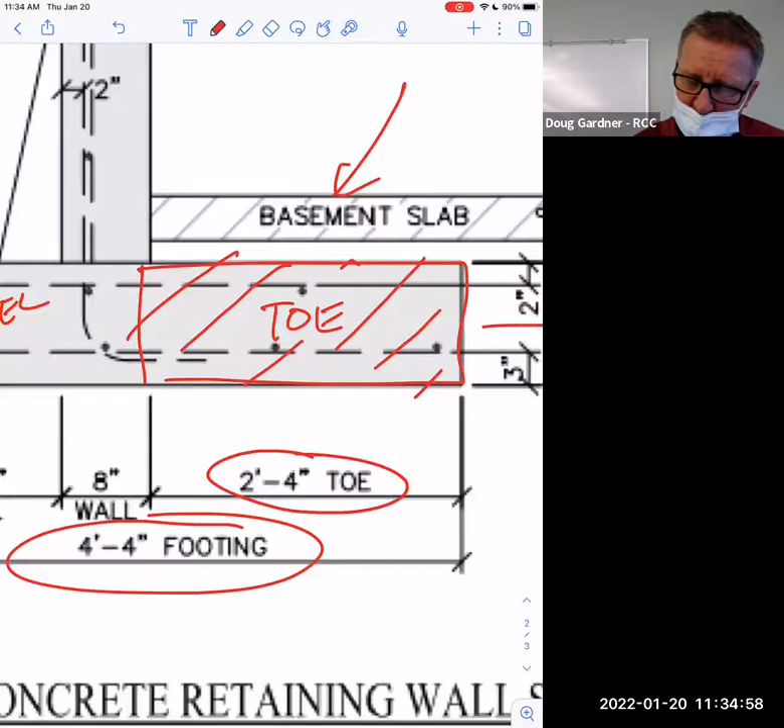But where's the line between spending people's money, and people kind of hate engineers for that reason. They'll spec out a bunch of expensive stuff, and it obviously costs money to hire you, so they don't want to use engineers if they don't have to. So I may give you extra credit and have you recalculate what's the minimum this could be. But we'll talk about that later.

Okay, so I made this awesome chart, which I actually made for my calculus class a little while ago. And so obviously to get the moment, that moment is force times distance. So don't you need to know the force of the roof and the distance that weight is?

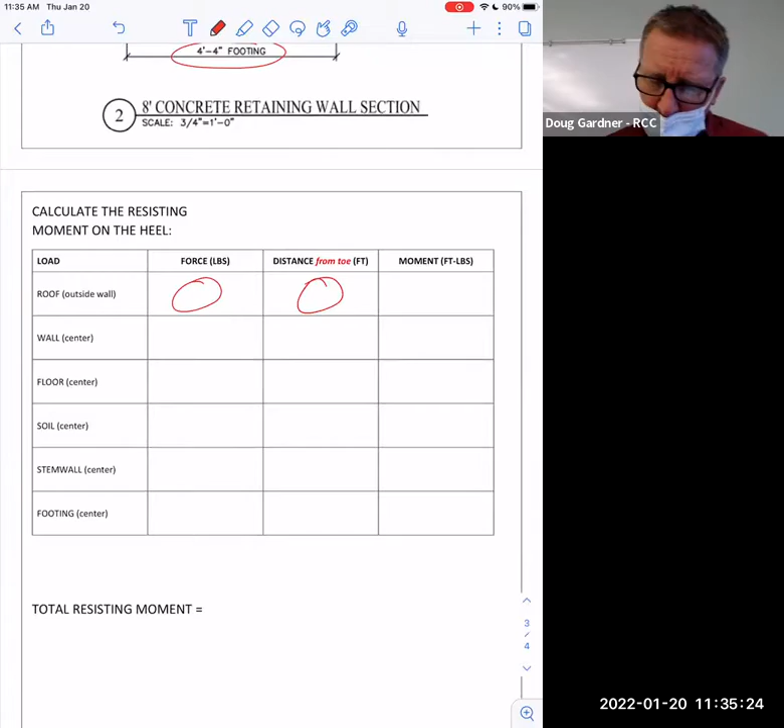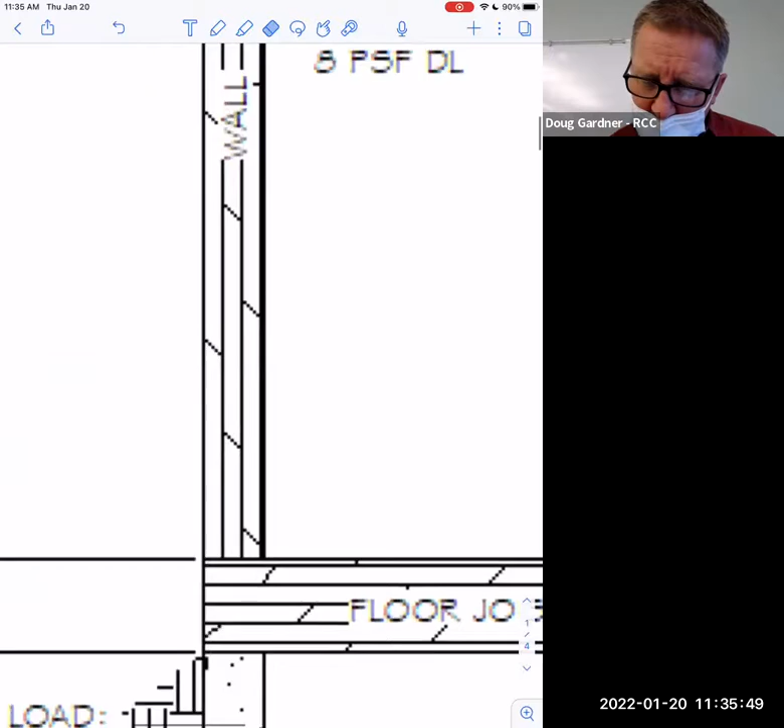Now, the only last thing we have to talk about before I can shut up and let you think is, let's just consider this wall, for instance. This wall is apparently like 8 inches wide. Where should I put all of that weight? Let's say the wall weighs 100 pounds. Where is that 100 pounds? Is it here? Is it here? Or is it right in the middle?

And generally speaking, that's the answer, is right in the middle. So let's do that for these calculations.

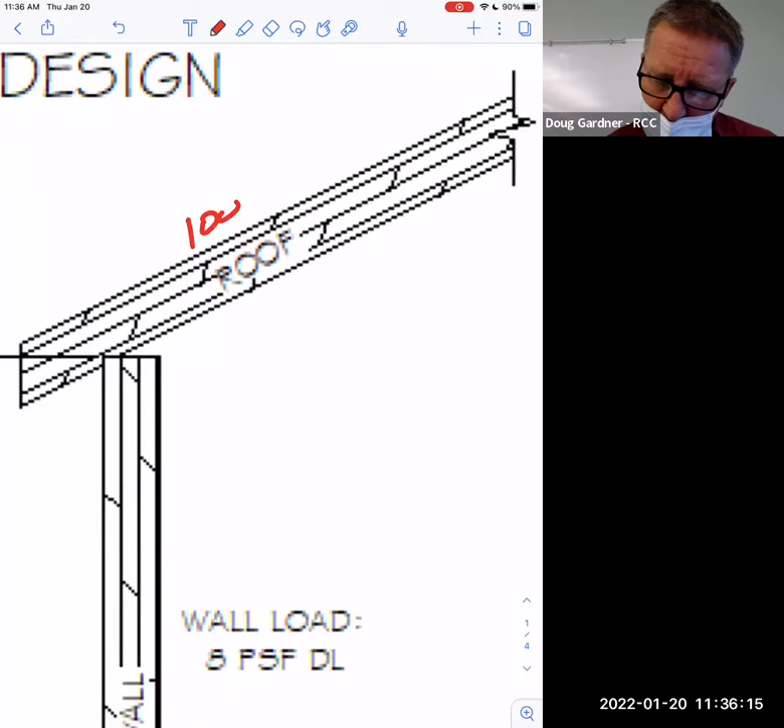Now, that can sometimes get screwed up. Like, see this roof rafter up here? If this rafter weighed 100 pounds, notice how it's attached to that wall up there. You see it's actually kind of on the outside edge. So there's a little bit of tweak to this. I guess you might say the wall load actually might be here, but the roof load actually might be there, right on the outside, because of how that actually goes together up there, since that just sits on the outside edge of the wall.

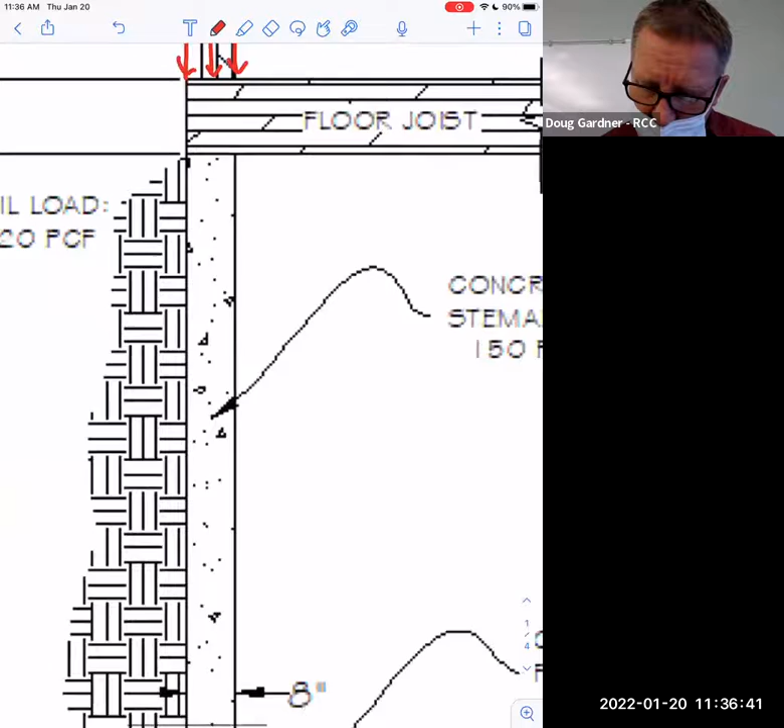So the point is, all of these things, like the floor joist, where are we going to consider its weight to be? If this is 1,000 pounds, where's that weight? Let's just put it in the middle of the wall.

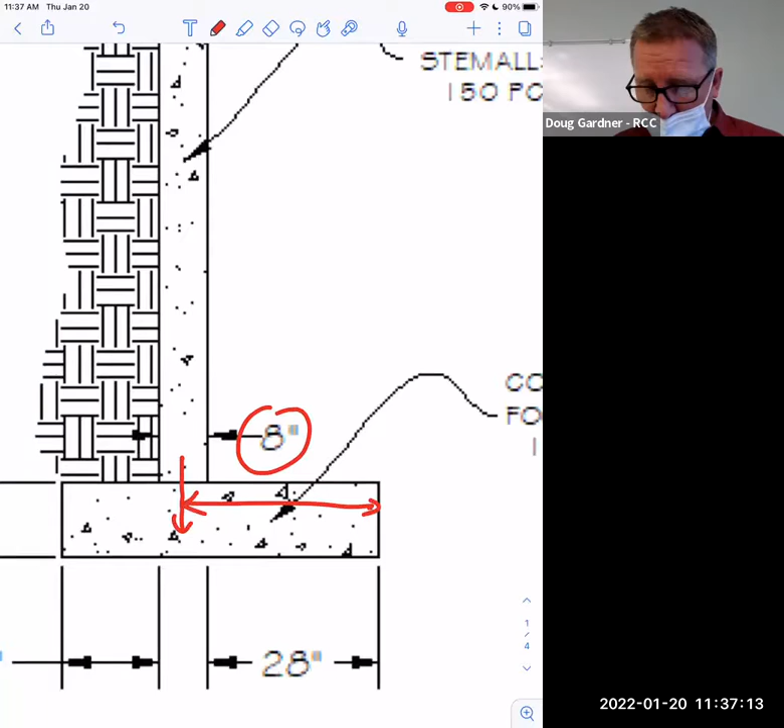So see, the important thing is going to be to say, okay, if the wall's weight is right here, then what's its distance? Well, then that's its distance. So the distance is huge. The distance is more important than the weight. So that's exactly right, because that's in the middle, that'd be 4 inches.

And this entire chunk right here, maybe it weighs 1,000 pounds, but where is its weight? Well, it's right in the center. Isn't that what we've been learning in this class? You can replace all of the weight with just one arrow. Maybe it weighs 1,000 pounds, but it acts as a particle, right in the center of that thing. And of course that'd be important, because then that's how I determine the distance.

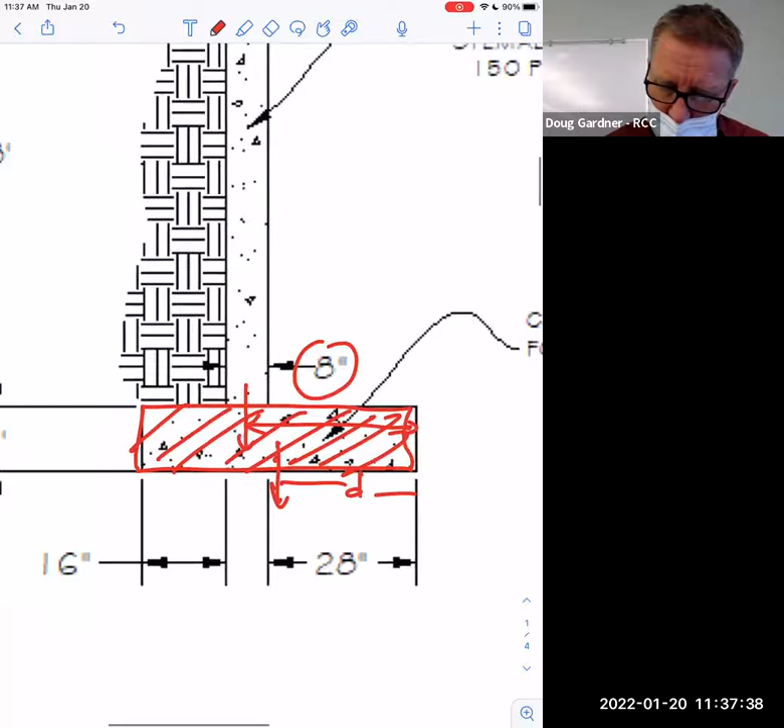And then the other problem is, all of these measurements are in feet, right? So anything that says inches, you're going to have to convert it to feet. Otherwise your calculations aren't going to work. So think about that. Work together if you want to, or do it yourself, but check, don't just answer them all and then go, oh, I'm wrong. Compare this to your neighbor.

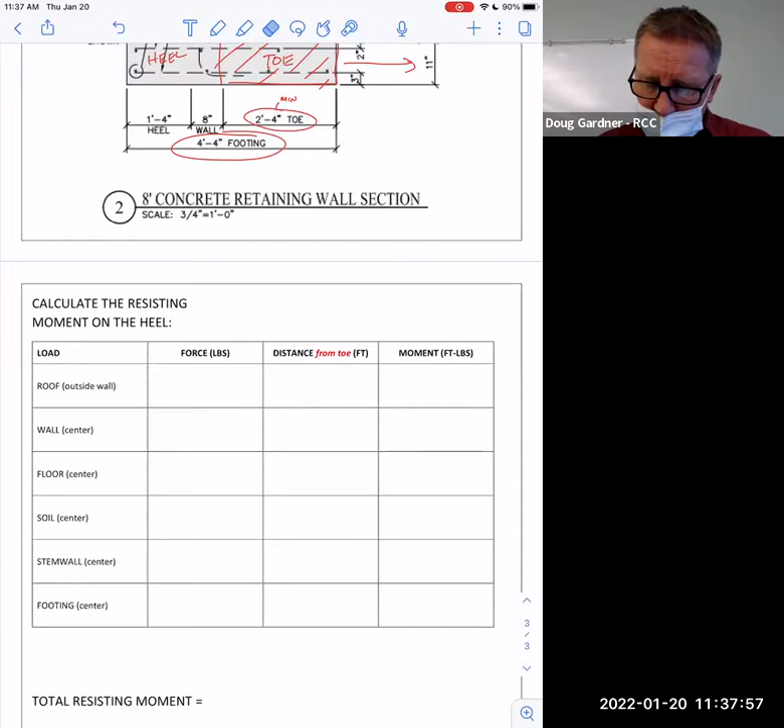So obviously I get a force and I get a distance, and I can multiply them and get the moment in foot-pounds. And as soon as I add all of those up, then I'll have the total resisting moment. How much desire does the house have to keep that thing from tipping over?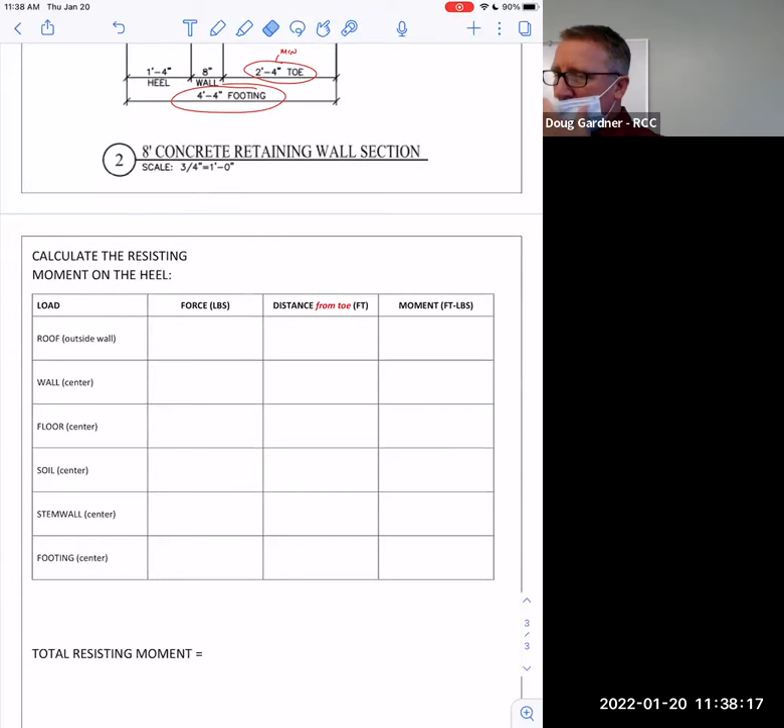Also, you may not have had a lot of exposure to reading plans, so this is kind of a good opportunity to learn how to read dimensions, make sure you understand where the measurements start and stop. So ask me those kinds of questions too.

So then we said a 1 foot slice of house. What's that go over? It's for everything. So we're literally thinking of every single thing we see as 1 foot into the paper, so to speak. We're figuring out 1 foot. And if we figure out that 1 foot, then the next foot and the next foot and the next foot will all be the same.